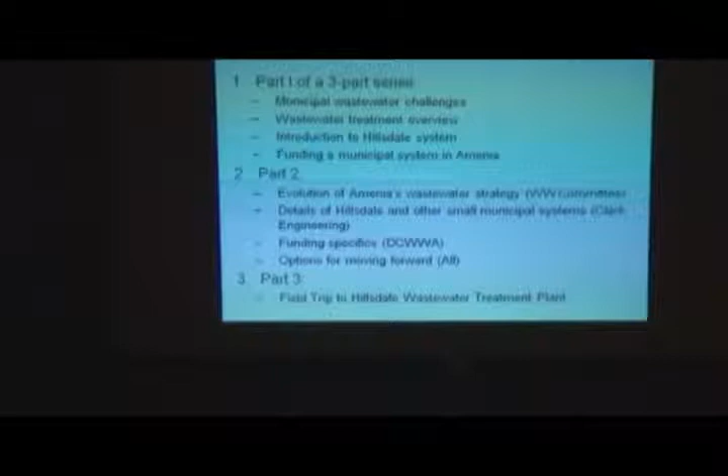The second part is going to be a more technical presentation, where the wastewater committee will talk to you about how they came to make some of the decisions that they did, and the engineer, Clark Engineering, will talk to you about small community examples in other communities similar to what you're looking at for Amenia.

And hopefully the Dutchess County Water and Wastewater Authority will be able to talk to you more about some of the funding specifics, because that's really, I know, what you're most concerned with is how can we make this affordable.

And part three is actually, and this is all kind of setting you up so that hopefully you will come on this field trip to see the treatment facility at Hillsdale, because that is the technology that has risen to the top as maybe the best for Amenia for what you're trying to do here.

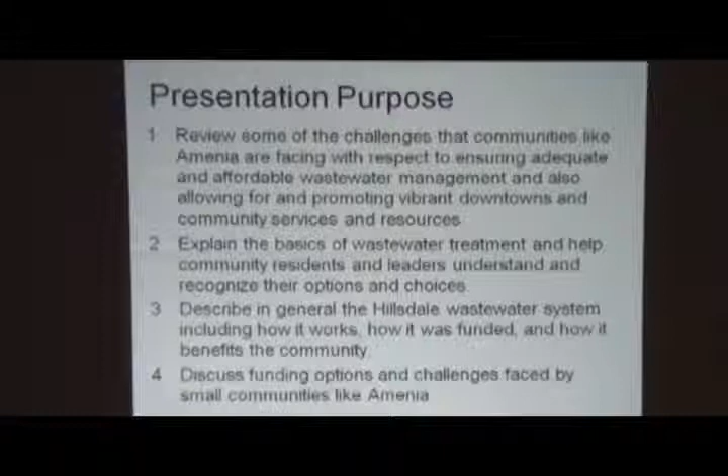So today, again, is to lay some of the foundation of that. I want to review some of the challenges that small communities like Amenia face with respect to assuring adequate and affordable wastewater treatment while still assuring that you have a vibrant downtown with the services that you want and that you need. I want to explain some of the basics of wastewater treatment to help community residents and leaders understand and recognize these options and the choices they're making.

I'm going to describe very generally how the Hillsdale treatment system works, to lay the foundation for a more technical presentation next time. And I'm going to talk a little bit about your funding picture as it is right now and what some of the challenges are that you're looking at.

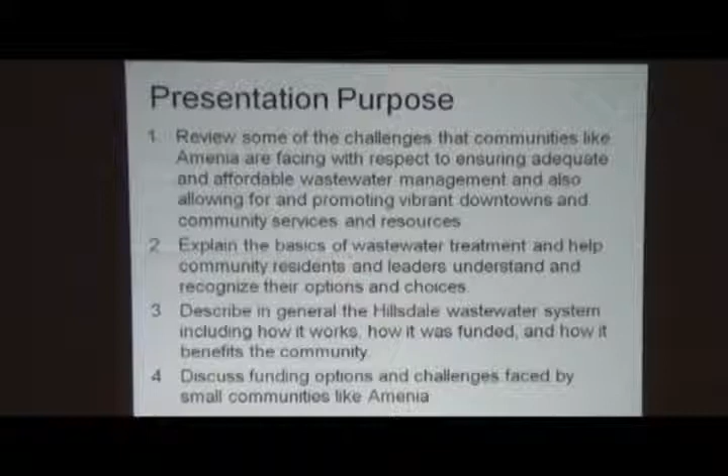So, in communities like Amenia, typically the easy communities have been done already. Those are more larger communities with dense populations where the consequences of failing septic systems are very obvious, dense populations that can bear the cost of the treatment system. Then you have these very small rural communities that are working okay with septic systems, but you're in that intermediate size where, like many communities of your size, you've wrestled with this issue for many, many years.

And proposals have been voted down in the past. You're struggling to find a way to make it affordable, so you're not alone in that. But I recognize there are some serious challenges that have a lot to do with your community size. More densely populated areas have more users per length of pipe and more payers into the system.

And quite honestly, the technical expertise that's available and the training for engineers and others has really focused on larger systems. So this idea of alternatives for small communities has been an emerging field that is growing, but it's not exactly in its infancy - it just doesn't have the history that more conventional large-scale central sewer systems have.

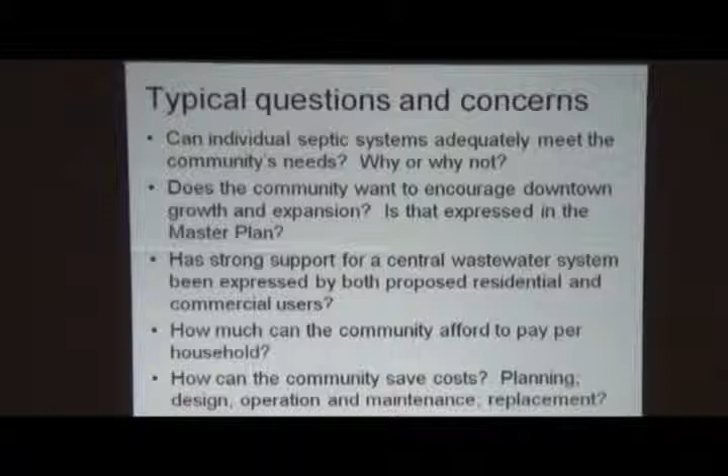And how can the community save costs? How can we make this plan more affordable? Is there something we can do to make it more affordable for us? Is there something in planning or design, operation and maintenance, or replacement? For example, should we be serving a smaller or larger area? Maybe more people, more payers, smaller areas, smaller system. Is there some planning tasks we can go through to help us bring those costs down?

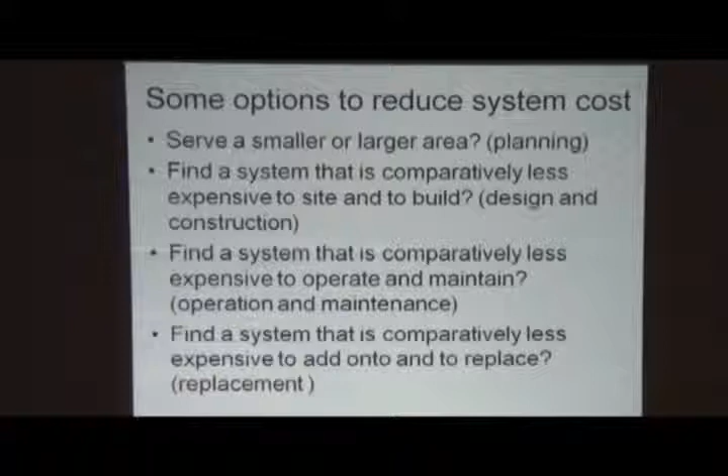Finding a system that's comparatively less to construct and build - that's your design and construction phase. What about a system that's less expensive to operate and maintain - that's your operation and maintenance. And finally, how about a system that's less expensive to add on to and replace down the road? These systems don't last forever, and it's something you want to be thinking about 20 or 30 years down the road, as you'll be looking at expanding, replacing, upgrading, or at the very least repairing the system. So how affordable is that component going to be?

So I wanted to start out with some wastewater treatment basics to help folks who may not have a strong idea, or have some idea but could use more information. I think this is a really important part. We'll talk about why wastewater treatment is important, what wastewater is, how we treat it, and what options small communities have in terms of how a system is configured and designed so you can get the best system for your community.

Well, why is wastewater treatment important? Because we're protecting the waters that we care about. We're protecting our water-based economies, the rivers and streams that we love so much, our recreational resources, and of course our drinking water supplies.

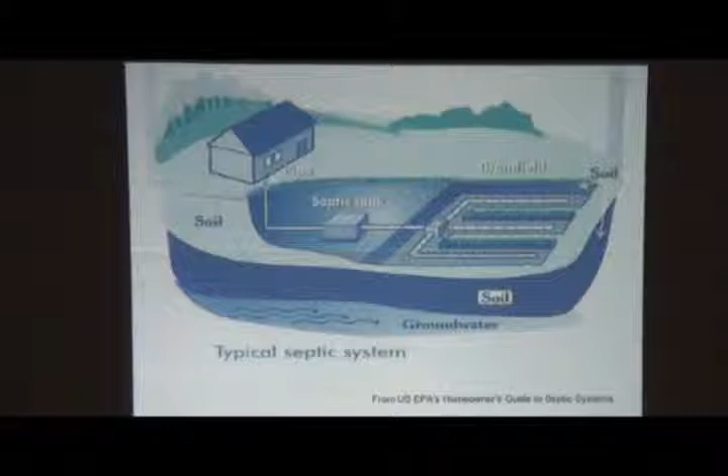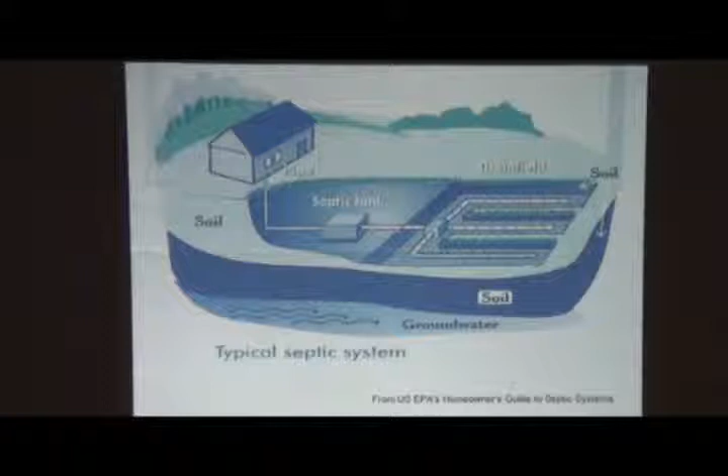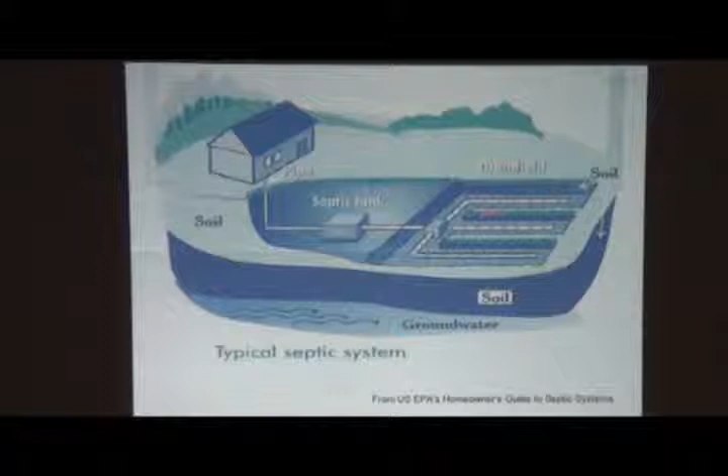Septic systems are your typical first line of defense. A standard septic system - for those of you who might not be too familiar with what's underground, and if you're anything like me, your septic system might not look like a traditional one - it might be simpler, but you've got a collection system in the house, and pipes carry it down to a septic tank underground where the solids or sludge settle out. This settled wastewater comes out to the distribution box, which makes sure each of these pipes gets an equal amount of water. These pipes are laid in soil, which is where most of the treatment is happening.

So what's the problem? Well, one problem with septic systems is they need to be maintained, and as you can imagine, when things are underground, it's harder to see something that breaks. If you're not seeing something visual, like surfacing of wastewater, you may not even realize you have a problem. Maybe a valve is broken off in your tank, maybe your distribution box is crooked and it's only sending wastewater to one line. There's any number of things that could cause your system to be functioning substandard.

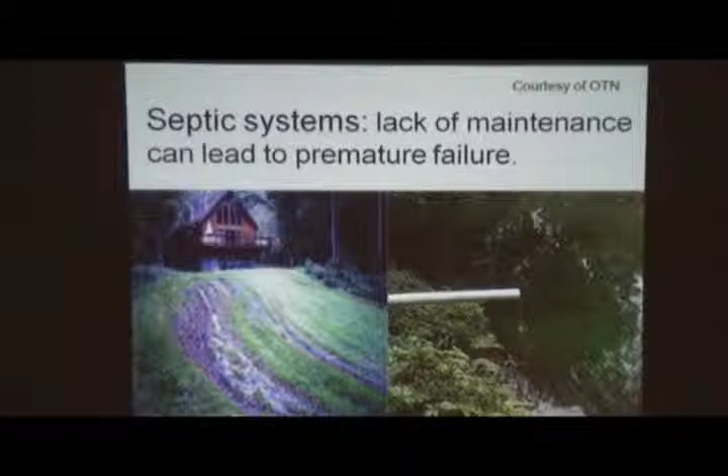Not good. Some other causes of failure or substandard septic system operation: maybe the person who was looking at that site when they were first planning your system didn't evaluate it well enough. Maybe they didn't look at the soils, or they saw the neighbor had good soils and figured your site had good soils too, and maybe it didn't. Or maybe they didn't pick the right system for those conditions, or the installer didn't exactly follow the directions.

That certainly happened. Sometimes you end up using your system more than you thought. Maybe it was an older camp or household, or a newer family moved in with children and you've got a lot more water use. Maybe you added a bedroom.

The system, yes? How many homes in the current district have failing septic systems?

I can't answer that - write that down. I know a number of systems that were failing have been addressed. A long time ago when we did our first income survey and went through the middle of town in the summer, it was quite obvious there were a number of systems you could smell. And I know quite a few of them have been repaired, but I'll let the committee address that.

You also may have inappropriate use, maybe flushing the wrong things down the toilet, quite honestly. That can stress and even damage your system to the point where it has a catastrophic failure. A good example is latex paint - you shouldn't be putting large amounts of latex paint down there, or much at all. I don't let any latex paint go down my system because it really will clog up that drain.

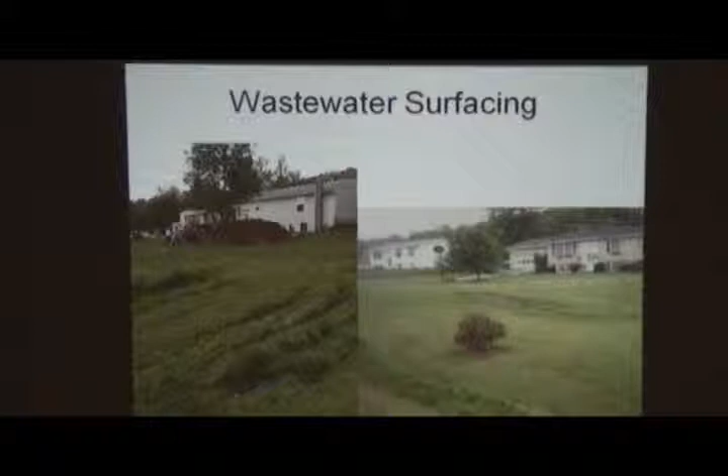Some problems you'll see visually: you see wastewater on the surface of the ground, and it's pretty obvious - you can see it, you can smell it. When it rains, it washes all that untreated or partially treated wastewater into your streams, rivers, the ocean, so it gets carried away beyond the site where there's actually a failure.

You can also have failure underneath the surface of the ground. Maybe your septic system isn't working very well, and untreated waste is going down into the groundwater where it moves towards your surface waters as well. So you can have failures that you don't even know about, that you can't even see.

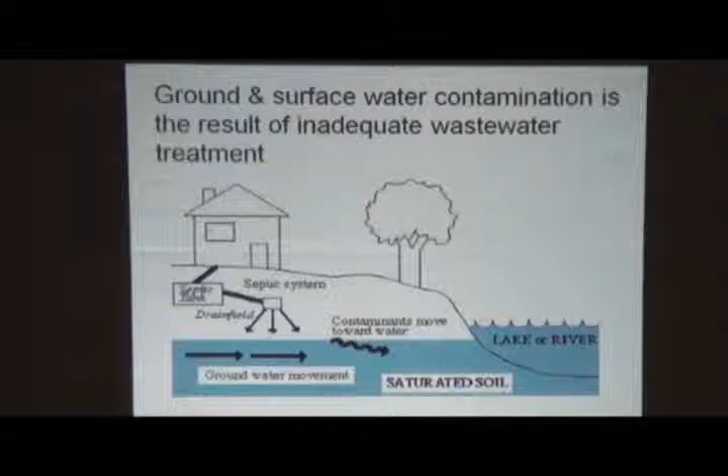Some of the problems are pathogens. What are pathogens? Organisms that cause disease - the ever popular E. coli, the bacteria everyone's pretty familiar with. We've also got a couple of protozoans: Giardia lamblia, which causes giardiasis, and Cryptosporidium, another problem protozoan. We don't really have much typhoid, but Salmonella is another bacteria, and then of course viruses that cause a whole variety of gastroenteric problems resulting in diarrhea and vomiting. These are all organisms that can be transmitted in untreated or poorly treated wastewater, so we have a potential health threat.

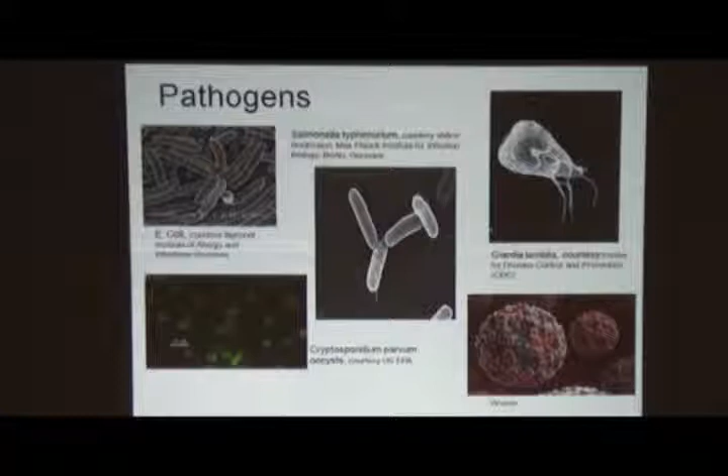Another problem with improperly or poorly treated wastewater is that you have a concentration of nutrients - we're talking about phosphorus and nitrogen. What do we use phosphorus and nitrogen for? Fertilizer. So the same thing happens when these nutrients get into your surface waters - they cause the vegetation in the water to explode, and you can get a lot of overgrowth.

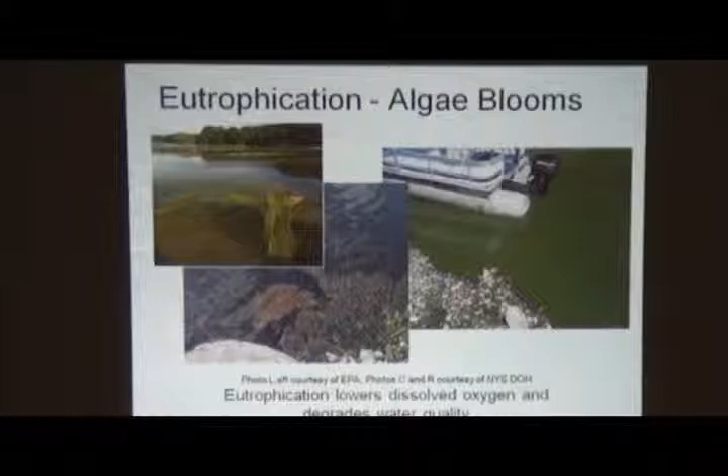For example, you can see the goo here, this algae on the surface, or it can just be totally suspended in the water so that the water looks entirely green or brown. That process is called eutrophication, and it causes problems because it lowers the oxygen levels in the water and degrades water quality. Not to mention it's unsightly.

Some other things to think about when considering a septic system are separation distances. Regulations are set up to provide prescriptive distances you need to meet, both horizontally and vertically. For example, your well needs to be at least 50 feet from your tank, and it needs to be at least 100 feet from your absorption system.

Your system can't be near your neighbor's well, or their system can't be near your well. There's also vertical separation distances, so if you've got a limiting layer underneath the soil of your system—it might be bedrock, very high groundwater, seasonally high groundwater, or a difficult clay layer—you need at least 2 feet separation distance from your treatment area to accommodate that.

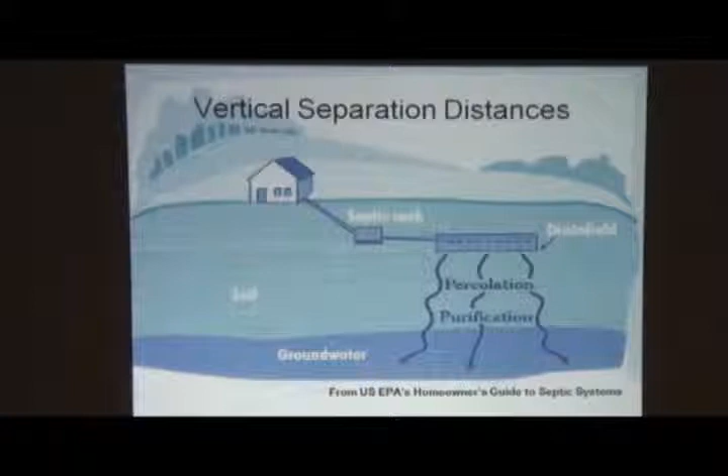These separation distances are often the challenge for small communities like yours, because many times the communities were built without attention to that, and some of the houses are on small lots. They can't meet the separation distances. They may have poor soils, so a traditional septic system is difficult to use, and they may have non-traditional systems that aren't up to snuff in terms of operation.

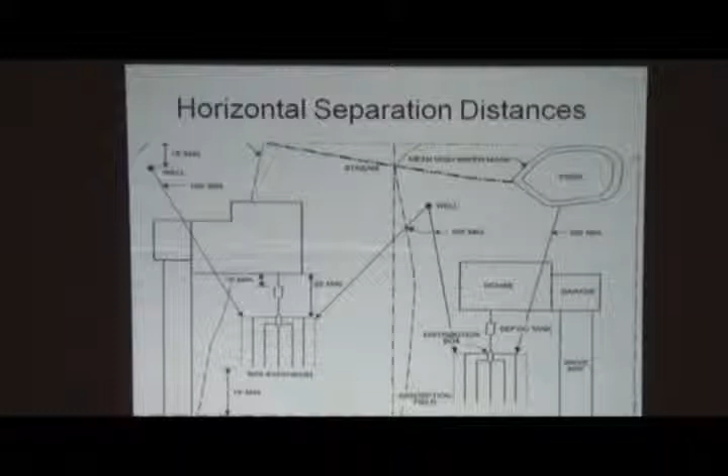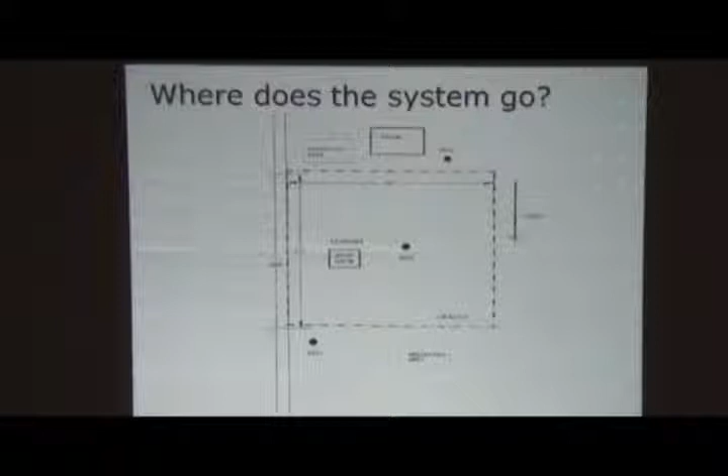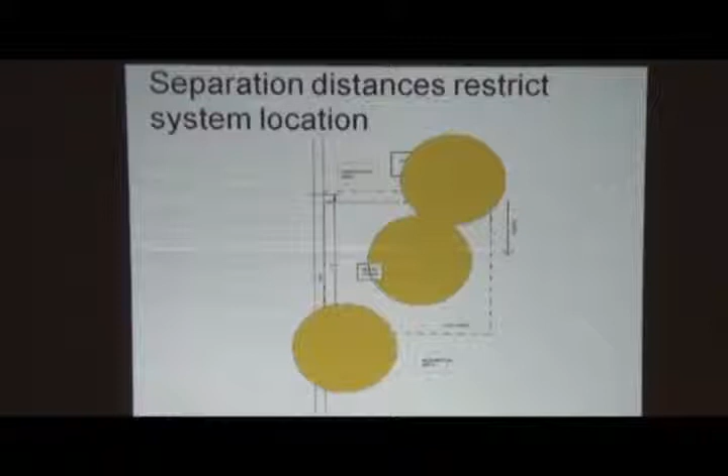Just to point out this issue of separation distances—here's this lot, the proposed house is here, and the well's already in the ground. You put the well in the ground, and this happens a lot; you buy a house and put the well where you want. Here's the neighbor's well, here's the other neighbor's well. So where does the system go? Now we need 100 feet separation from each well. You draw a circle of 100 feet around each of those wells, and it doesn't give you as much space on that site as you thought to put your septic system. So that's a consideration.

And of course, there's regulations that govern these systems, whether it's a septic system or a municipal treatment plant. There's design standards, drinking water quality standards your drinking water sources have to meet, wastewater discharge quality standards if you have a municipal treatment plant discharging to a surface water, and stream water quality standards depending on the stream you're discharging to—it may have even more stringent requirements, which we'll talk about in a minute.

Just briefly, I wanted to talk about who regulates, because it can be a little confusing. Essentially, the Department of Health deals with issues of protecting drinking water sources and public health—that's their sphere of influence. Whereas the DEC looks at protecting waters for other uses, like food sources, public recreation, commercial uses, and even industrial resources. So the DEC is that regulatory agency.

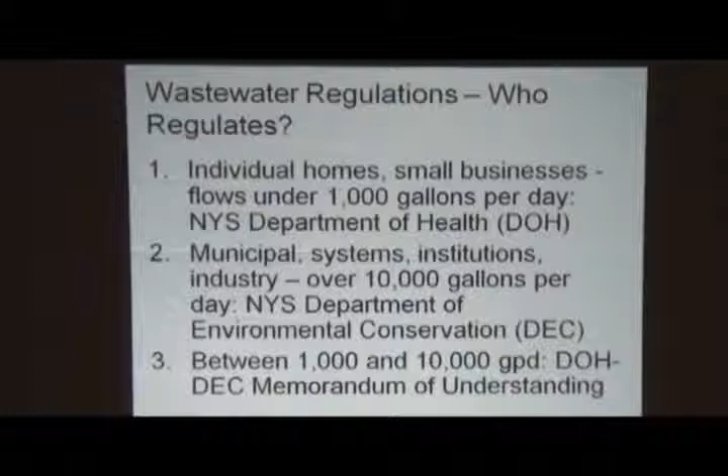When we talk about wastewater regulations—well, I heard the Department of Health regulates my septic systems. That's true: under 1,000 gallons a day comes under the purview of the Department of Health. Larger systems, like municipal systems, larger businesses, institutions, industry, over 10,000 gallons a day, are regulated by the DEC. Between 1,000 and 10,000, there's actually a memorandum of understanding between those two agencies, such that if the Department of Health is already in there—say inspecting a restaurant that has an on-site system over 1,000 gallons a day but less than 10,000—they say, hey, we're in there anyway, so we'll be responsible for overseeing that system. That may help clarify some confusion about who regulates these systems.

So what are your options? As an individual property owner, suppose you have a substandard system or know of substandard systems in your community—what can you do? The very first thing you want to do is have a professional inspect your system, which will involve opening up your tank, very often digging up your D-box, the distribution box, and maybe probing that leach field.

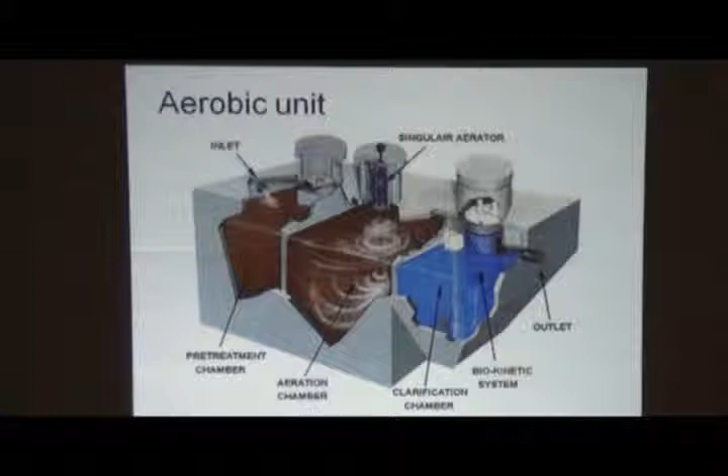I was just going to show you an example of what some of these enhanced treatment units look like. Sometimes they're like a treatment plant in a box, which is what this aerobic unit here, the Singulair aerobic unit, is. It's a treatment plant in a box. Other examples are technologies that are media-based.

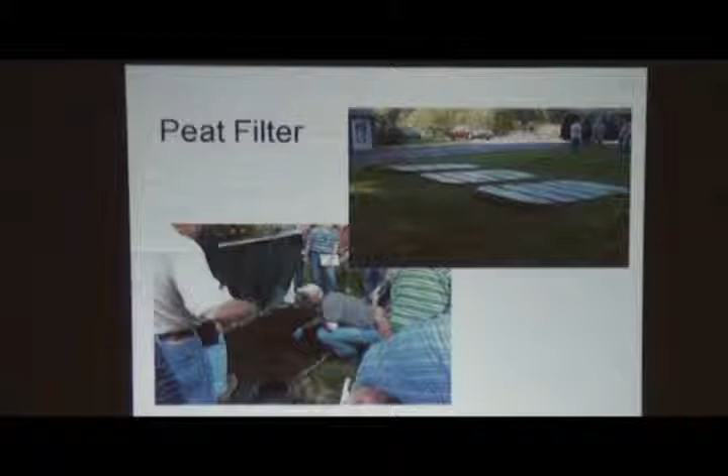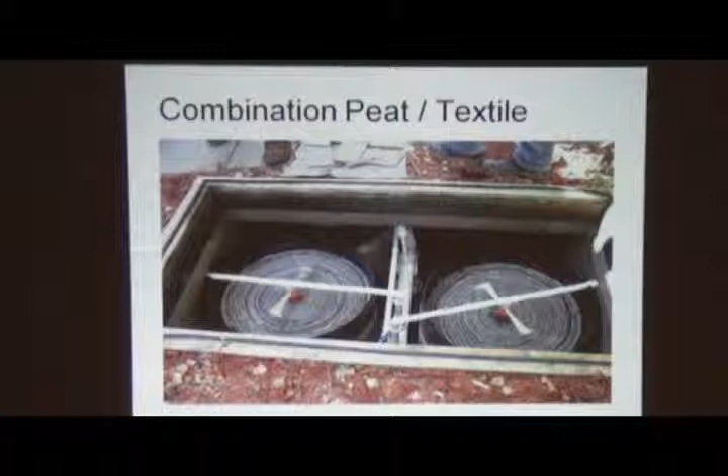For example, you might have a peat system, which produces a very high-quality effluent. Here's a combination of peat and a man-made textile all rolled together, and the wastewater is being distributed over that treatment unit. Foam cubes is one system that we've seen out there. There's any number of media that you could use in these boxes to produce a higher quality effluent.

In fact, I remember one of the systems we saw out in Rhode Island, it was leftover sneaker chips from the Nike plant they were looking at using as a media.

And finally, as an example of another media filter, this is a residential installation of the Orenco AdvanTex system, which is being used by the municipality of Hillsdale. We'll talk about that more in a minute. But you can see this is actually on Skaneateles Lake, which is Syracuse's water supply.

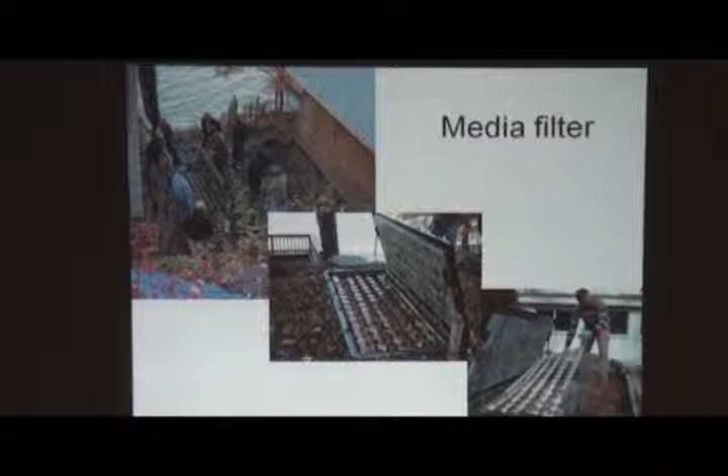And you can see that system is darn close, and there is not much room at all to be working with there. The textile sheets are in this box, and this thing that the guy is lifting up is just the distributors. The wastewater comes out of that onto the media in the box. But we'll talk about more of that in a minute.

But it comes back to what's your vision for your community. If you're really looking to expand that downtown area to get large water-using businesses in there, to have the kinds of services that it's very difficult to sustain, even if you were to put in an enhanced unit, which is what certainly Amenia has been talking about for many years, is improving and expanding and being able to create a more vibrant downtown.

So that brings you to the idea of a municipal system, and that's where I wanted to talk today about what is involved in wastewater treatment, so you can see where some of these decisions that have been made, why they were made.

So very basically, wastewater treatment, it doesn't matter whether it happens in a tank or a municipal plant or a commercial system, you're doing the same processes. You're collecting the wastewater, you're separating out the solids from the water portion, you're treating those two waste streams, you're dispersing the treated wastewater, and you're disposing of your treated sludge.

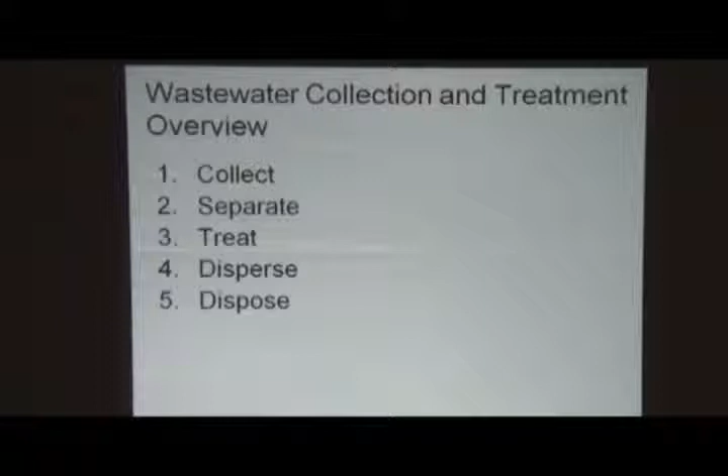So again, collection and transmission. We're collecting wastewater from the source, transmitting it to the location. Separation and treatment. We're separating the liquid from the solids, and we're biologically treating the wastewater and the solids separately.

The biological treatment process is called secondary treatment, and that's the bulk of your wastewater treatment. That's where the real treatment's taking place. And then you have this even further treatment, a polishing step, where you might be, for example, dealing with unruly nutrients, and phosphorus comes to mind, particularly in the case of Amenia.

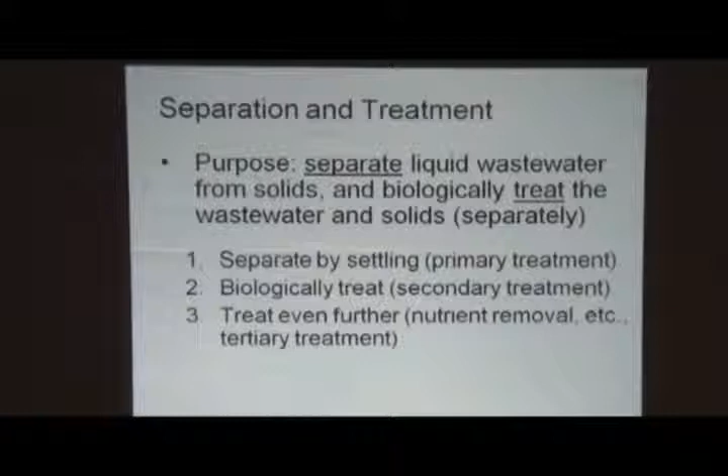Dispersal, again, you're dispersing the treated liquid. You may be doing that to a stream, or you may be doing it subsurface. We'll talk a little bit about that. And you're disposing of those treated solids.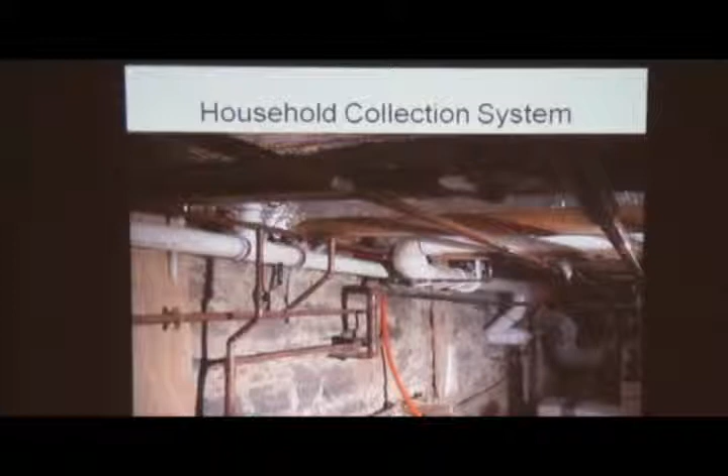...but still the same concept. You're collecting wastewater from the house the same way that you're sending it into a municipal sewer.

And there's two basic choices of sewer. One that handles solid matter and one that doesn't. And it makes a difference. It makes a difference to you. So let's talk about that.

Some examples of some solids handling sewers are typical, conventional, what we think of as gravity sewer. You may also have heard of things like grinder pumps and vacuum systems. These effluent systems, these effluent sewers aren't dealing with the solids. They're not solids handling sewers. And how do you get the wastewater to the pipe?

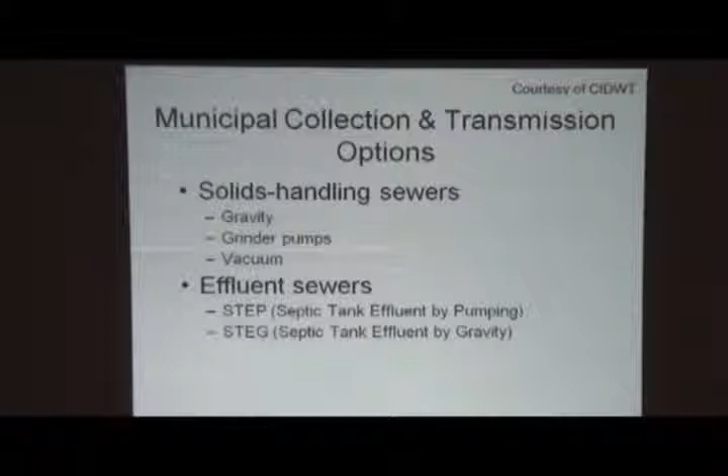Well, maybe you get it there by gravity, and they call that septic tank effluent gravity, or STEG. Or maybe you have to pump it up to the line, septic tank effluent by pumping. So let's take a closer look at that.

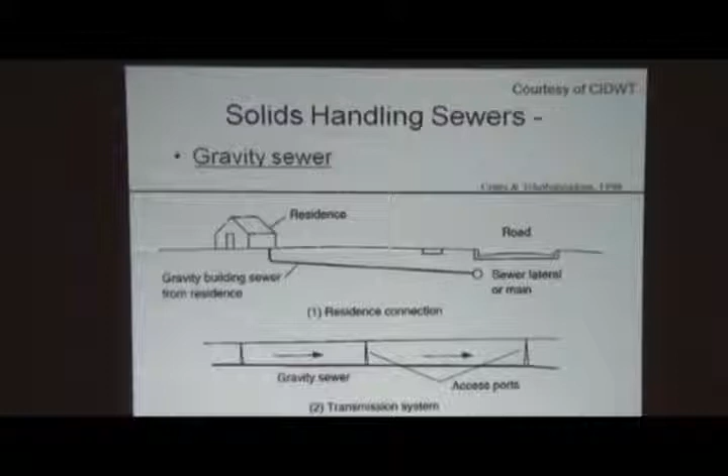And you can end up going very deep. After a while, you have to pump it back up. You can only go so far. So you can have pump stations that have issues that need to be maintained.

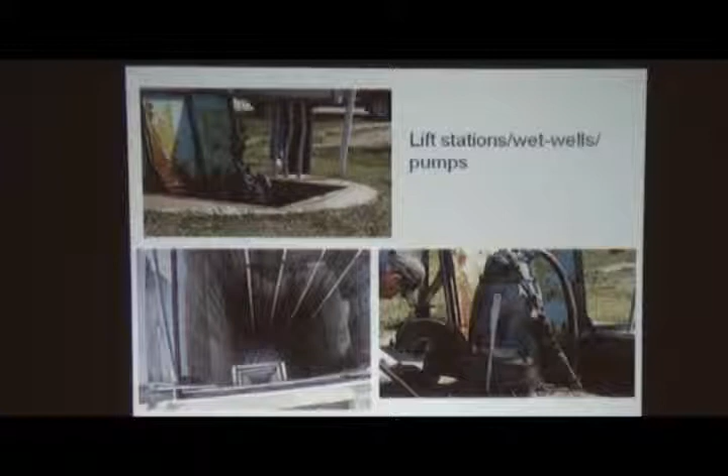Sometimes you can have water infiltrating, or if they're not kept well maintained, you can have water leaking into your system, so you're actually having non-wastewater being treated in your plant, and you don't want that. That's called infiltration. Some other options for solids handling sewers, you may have heard of grinder pumps.

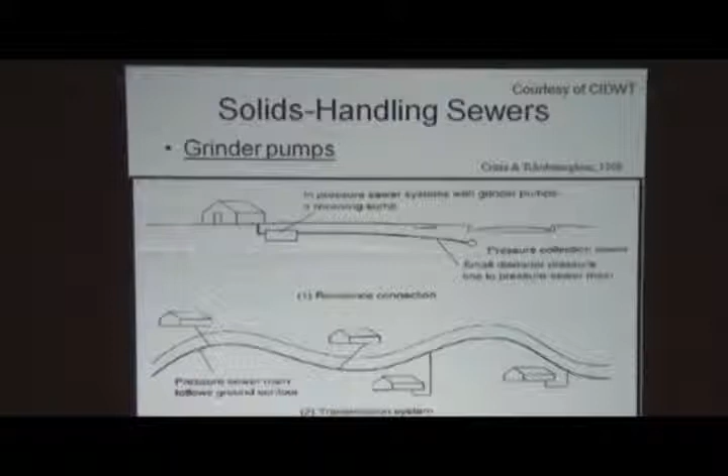What happens in this system is you've got a grinder pump that's grinding up your solids, and you're sending that ground mass down to this pressure collection sewer. You have some flexibility because this, again, is a smaller pipe. You can use a smaller size transmission main that can follow the ground contours.

Effluent sewers are kind of neat because instead of the solids going all the way to the plant and having to be settled out once they get there, you're actually keeping your septic tank. You might have a new septic tank, but you're still settling your solids in your traditional septic tank.

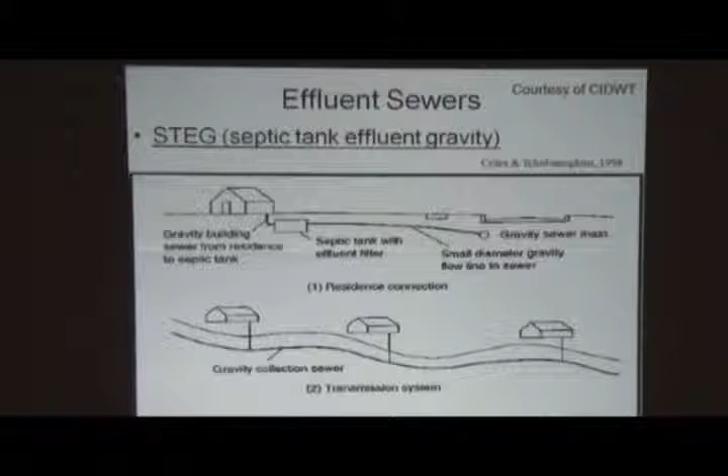And then here's your gravity feeding down to your gravity sewer main. Again, you've got a small diameter collection pipe that can follow the contours of the land and gives you more flexibility. It might be cheaper, we'll talk about that in a second. Or you might have a pump that pumps that settled wastewater to that small diameter collection system. So again, that's what STEP and STEG is, gravity or pump.

Very often you might have a combination of the two, depending on where the households are situated relative to your sewer line.

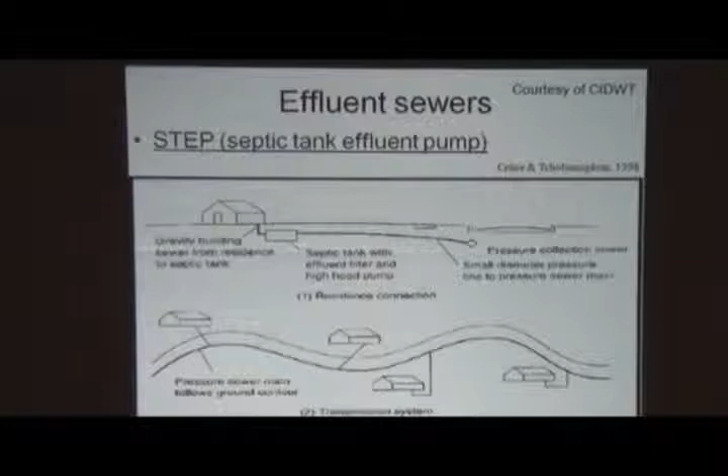Some of the features of a small diameter collection pipe: because they don't always rely on gravity, they can be buried at more shallow depths, which saves you the cost of excavation. In some areas, particularly rocky areas, that's a huge consideration and a huge cost. They can follow the contours of the land, and they may be less expensive. They should be less expensive and easier to install.

There's been a lot of progress in terms of technology for directional drilling, so you don't have the same excavation costs. You can install these pipes without huge excavation. They're less likely to have water invade the system, through inflow and infiltration, and they can be more easily routed around obstacles, which gives you more flexibility.

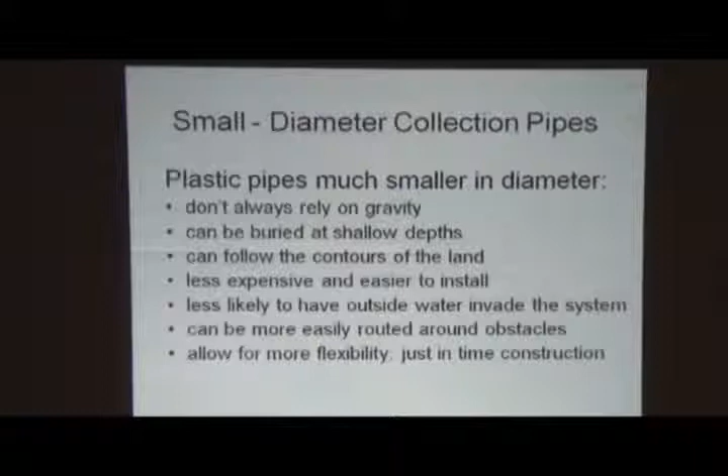It also gives you flexibility for adding on, what they call just-in-time construction. So you're not building a huge system in anticipation of growth that may take 10 or 15 or 20 years down the road to happen, so you're not overbuilding your system right away.

A conventional sewer system, a gravity sewer system, is appropriate for densely developed areas. This wastewater travels by gravity through a system of sewers and pumping stations. It may be more difficult and more expensive to install, and usually is. Of course, they require manholes and pumping stations, and as I mentioned, you may have an opportunity for leakage into that system.

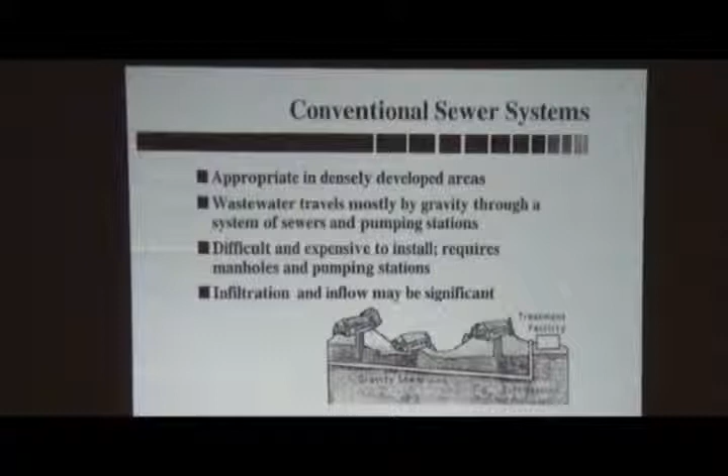Whereas the small diameter collection system, again, you're collecting your solids in your septic tank. You're sending that out to your small diameter line, either by gravity or by pumping.

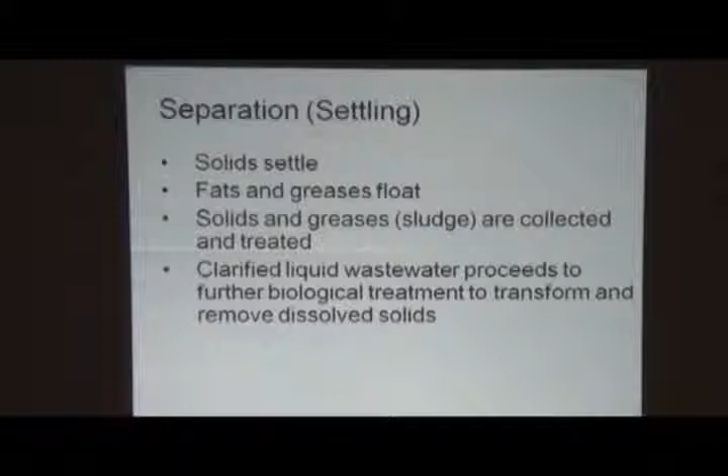So separation when you're settling, real simple. Whether you're in your septic tank or in a clarifier at a municipal treatment plant, the solids settle out, you want to make the flow go really slow, and the solids settle out, the fats and greases float, and this clear water in the middle. That's your wastewater proceeding on to the biological treatment phase, this clarified liquid wastewater.

So in a septic tank, you've got wastewater coming in the inlet, and it hits this baffle. A two-compartment septic tank works best, and you have a baffle. Because it's a vertical baffle, what it's doing is slowing down the flow right away, and it's forcing you to start the settling process. With slower flow, the solids drop out more rapidly.

So as you move under the baffle, the scum and greases and fats start to float to the top. Typically you might have a smaller opening to prevent the solids from floating up into the second compartment and to keep the scum and greases from getting sucked in here. You want to get as clear as possible liquid wastewater here, where more settling will still happen, and more grease will float. And you have another baffle to keep that stuff out.

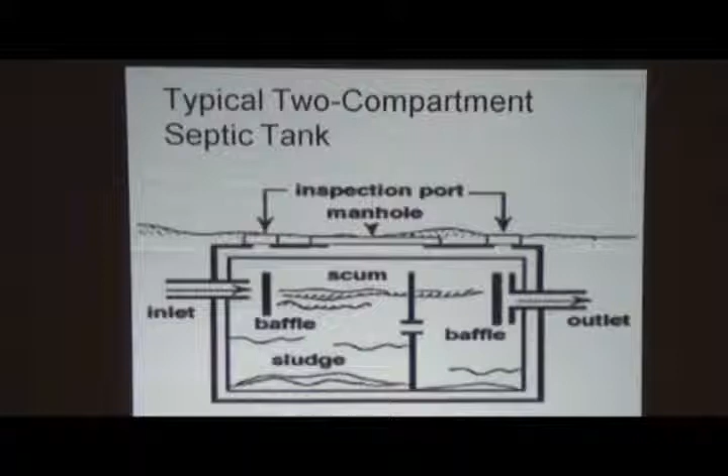In fact, you get a little degradation of those solids in the septic tank, and what happens is you get bubbles that surround them, a product of the respiration of the organisms, and you get bubbles around your solids, and they start to float up. They can float right out into your leach field and clog it up. So a baffle on the outlet helps to trap those solids, and many folks in the industry really recommend you have some kind of effluent filter there, to further trap those solids and keep them out of your leach field, because they will cause trouble.

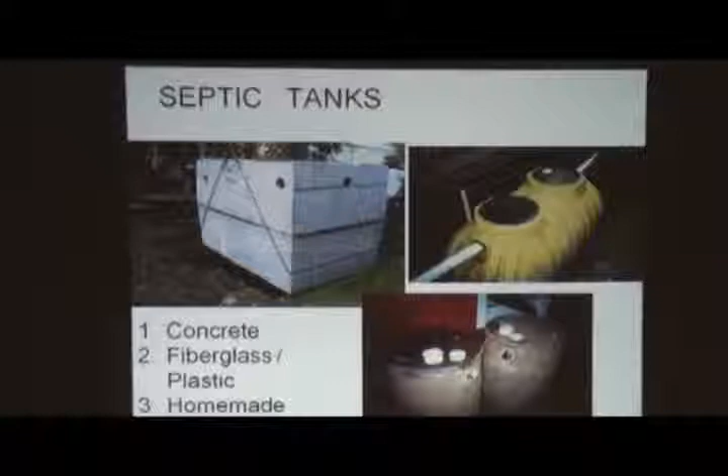Septic tanks, as you know, are made of a variety of materials. Concrete's very common. Plastic tanks are frequently used, especially on difficult sites where you need to move them in. And of course, the homemade tanks—we're still looking for a picture of that '55 Chevy that people say is buried out in the farmer's land.

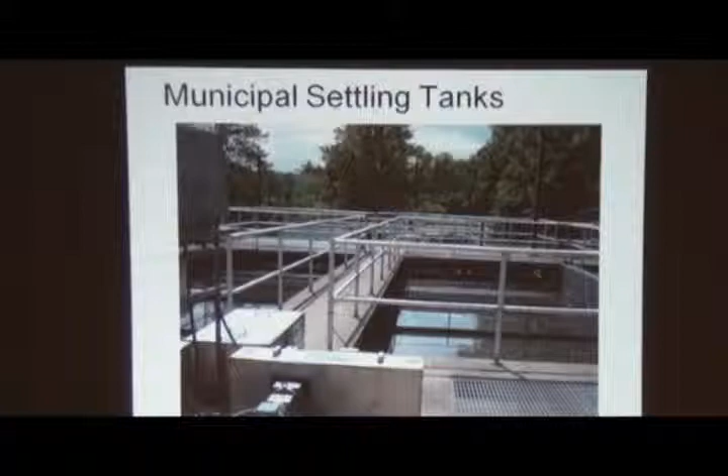But whether it's happening in a tank or a municipal treatment plant, it's the same thing. You might have a circular clarifier with something that goes across the top that scrapes your grease, or it might be a square tank like this that scrapes the grease off, and the solids are collected at the bottom for further treatment elsewhere.

So we move into the secondary phase of treatment, which is a biological process where the microorganisms break down the wastewater as food. When you think about this clear wastewater, you're saying, well, the solids aren't in there, what's the problem? Well, there's still a lot of dissolved material, and you'll see it as a color—the wastewater itself is colored, and that's from dissolved solids. So how do you get that out? You can't settle it. The microorganisms use that as food.

And as they respire, as they use this as food, they translate it into solid material—it comes out as bug bodies. Those organisms die and they become solids, which you can further collect. So you have solids collection even after the secondary treatment phase in a treatment plant.

So successful wastewater treatment is about providing a great home for your organisms. That's what all this is about, a good home for the organisms to thrive. You're going to provide them the location, the food, the wastewater, and ensure they don't have extremes in temperature, pH, or time—toxic things you don't want in your wastewater that could kill those organisms. That's why you don't want to be pouring poison down your septic tank or into the system, and why that can really be a struggle for some municipal plants—that pre-treatment, making sure industrial or commercial waste has those toxins or other high-strength waste treated before it comes to the plant.

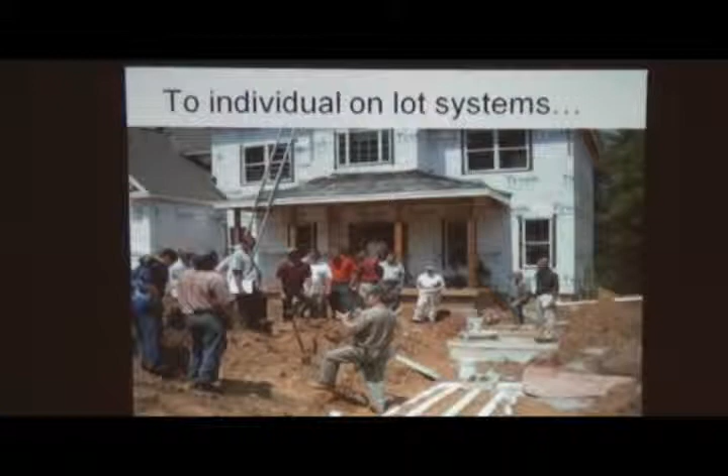But whether it's large-scale plants, an intermediate-sized community system, a small community innovation like Hillsdale, or an individual septic system, it's the microorganisms that are providing the bulk of the treatment, and that's the big thing you always want to keep in mind. So where do the organisms live in a typical septic system?

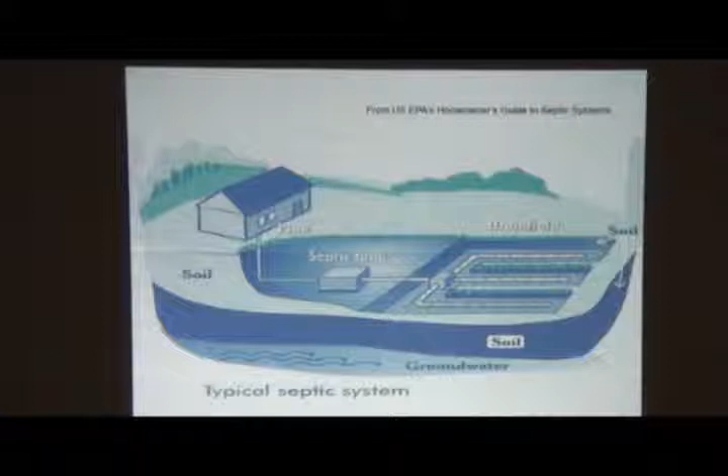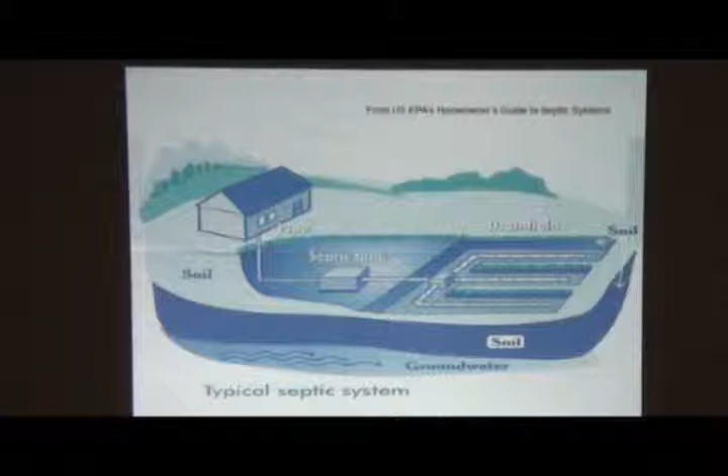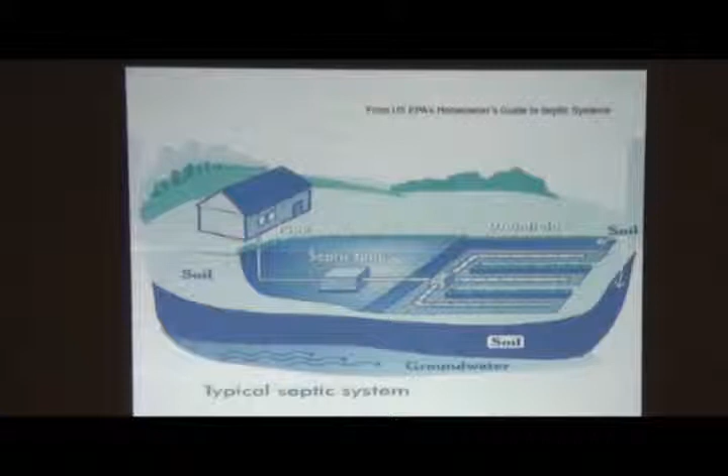There are organisms that live in the tank, and there's some that live in the field. The ones that live in the tank are what we call anaerobic organisms. They can thrive without free oxygen, and there isn't much free oxygen in that septic tank. The problem with those guys is they don't grow very quickly, and they take a long time to treat wastewater.

Whereas these other organisms, aerobic organisms that like free oxygen, work much more quickly and effectively and efficiently to break down the wastewater, and they live out in the soil in your field.

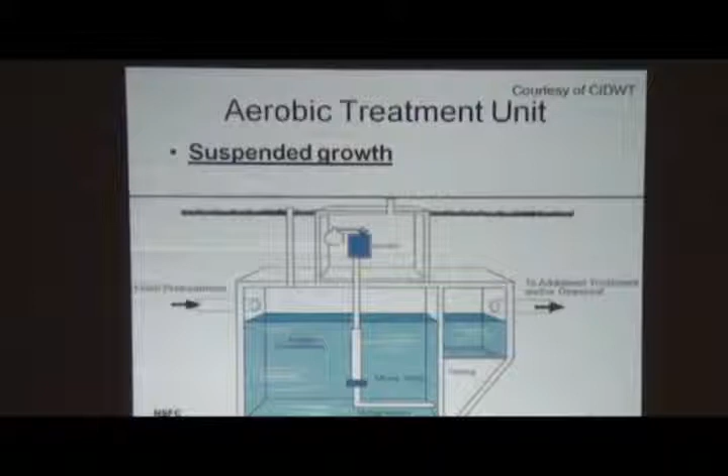In a municipal plant, your organisms may be suspended in a tank. This is actually a picture of an ATU for a residential system, same concept. When you're in a big wastewater plant, you've got a big tank and you're aerating that liquid to give the organisms as much oxygen as they need to devour your wastewater.

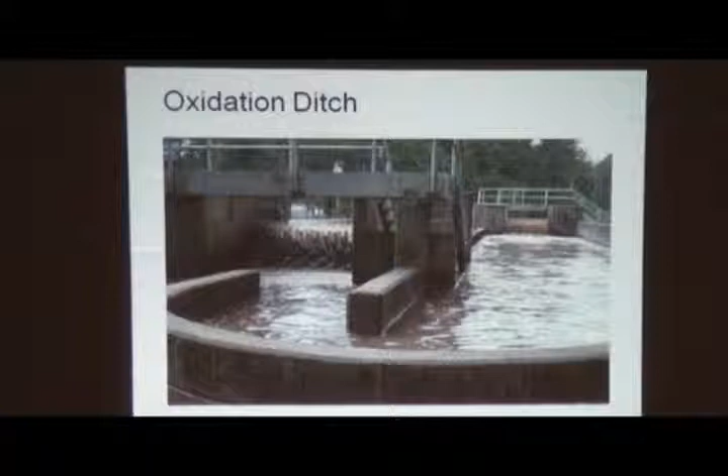They might be suspended in something like a lagoon. Here's an oxidation ditch, this is in Woodstock, and this is where the organisms are doing their breaking down. I'll show you a better picture here - this brush aerator. These two brushes keep stirring up that wastewater, keep putting that oxygen into the tank.

The problem with brush aerators or other aerators is they can get expensive from an energy perspective. It costs money to run them, so your electricity cost when you're aerating a tank can be substantial. And as you know, with energy costs rising, it's more important now than ever.

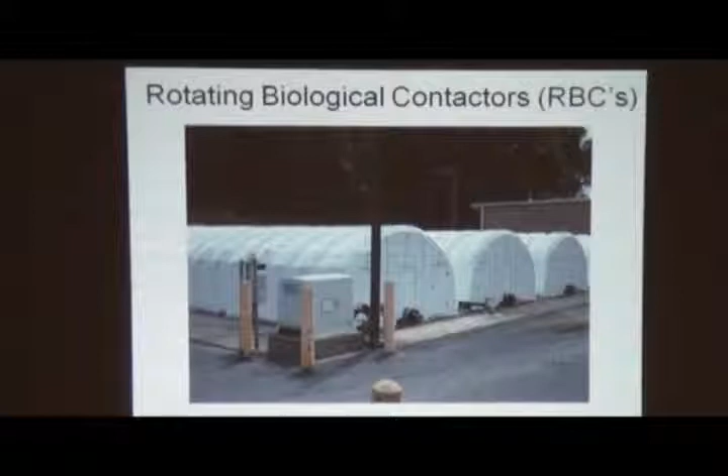Here's an example, this is in Saugerties Village, and these are rotating biological contactors. This is another kind of home for microorganisms. Instead of being suspended in a tank, they're actually fixed onto a media, and we call that fixed growth or attached growth. Inside those tanks are actually these discs.

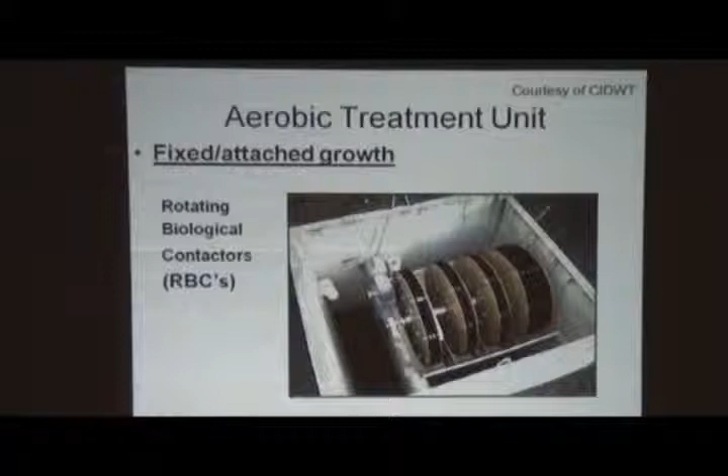And they're housed in these large tanks. Another common treatment system that used to be very popular in the old days is a trickling filter.

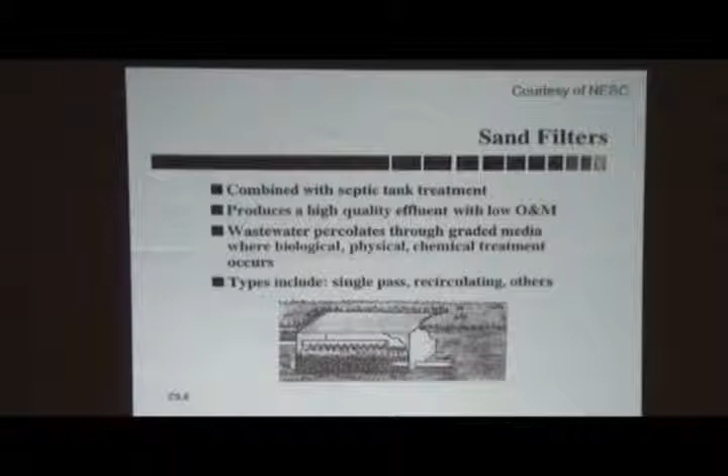Sand filters are a common small community option, and in this case, same thing - the media here is the sand, and the organisms are attaching to the sand particles, and that's where they are doing the treatment.

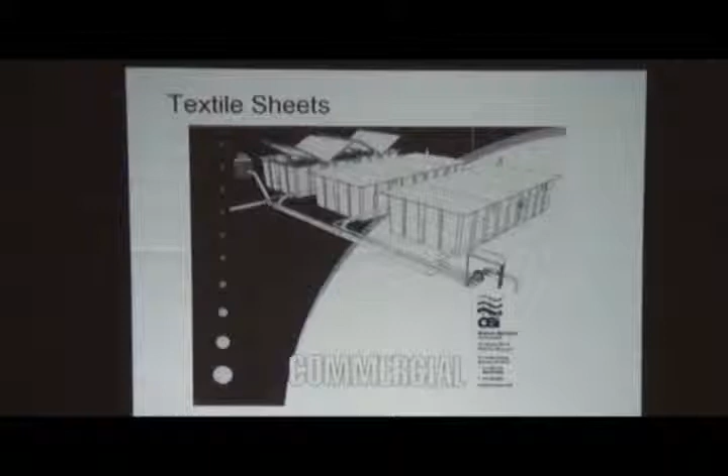As I mentioned, these textile sheets are another opportunity for a media that organisms can attach themselves to. This is what the Hillsdale treatment system is using, and we'll talk a little bit more about that in a minute. But just so you get the idea, we're finding a home, we're providing a place for these organisms to live that we can control and that we can ensure have the conditions for wastewater treatment.

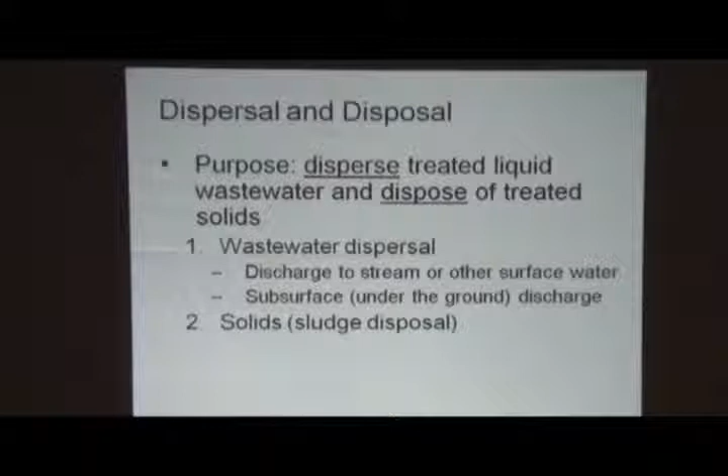I talked about stream classifications. When you're wanting to discharge to a surface water, it's good to know how regulators look at streams. They talk about headwater streams, where the streams originate up in the mountains, year-round streams which are perennial streams, and then we have seasonal streams which are intermittent - they're not running all the time. When you're discharging to an intermittent stream, you have to have a lot cleaner wastewater.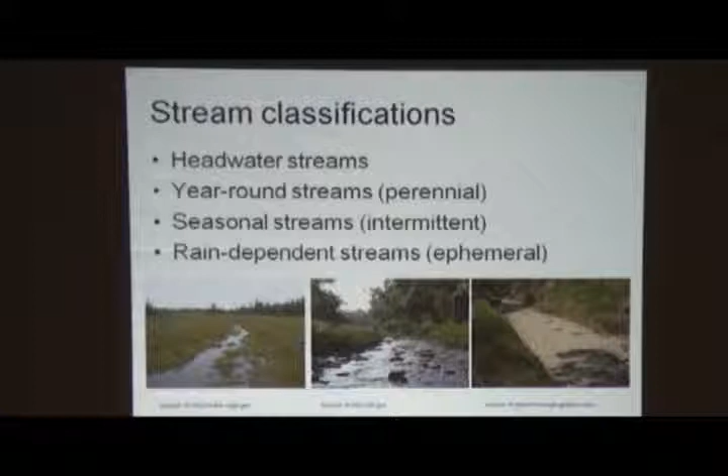You're not allowed to discharge the same quality as you would to a year-round stream, and that's a real important concept. In fact, in the Town of Amenia wastewater collection and treatment feasibility study that Clark Engineering did, they made these points about intermittent stream discharge limits being the most stringent level of treatment required by DEC. Your effluent's got to be as clean or cleaner than that receiving stream. In fact, the discharge is actually anticipated to improve the quality of that stream.

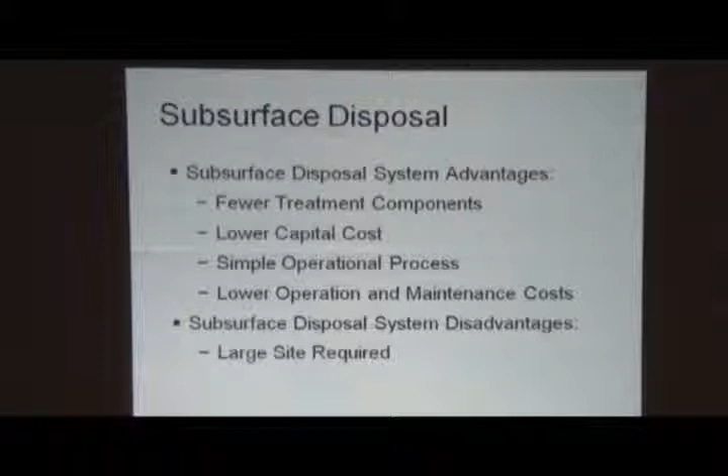Then we come to subsurface disposal. There are some advantages: fewer treatment components, lower capital cost for construction, a more simple operational process, lower operation and maintenance costs, and much simpler reporting requirements than a surface discharge. The biggest disadvantage is you need quite a bit of land, because you're putting it into the soil, and you need enough soil that can receive this treated wastewater.

Finally, briefly before we get to Hillsdale, sludge treatment and disposal. There are a number of ways you could treat your sludge, but at the end of the day you're taking the water out of it. Sludge sounds like it's solid, but it's really mostly water. So the first thing you need to do is de-water it, dry that solid to get as much water out as possible, so that no matter what you're doing with it, transporting or using it, you aren't paying to transport or use that water.

You may have heard of or seen digesters, large buildings where sludge is digested by anaerobic organisms. One of the byproducts of this anaerobic digestion is methane, and many plants that do anaerobic digestion will capture that methane and use it for energy. You may also compost. If you let the sludge sit in a pile, it's like at a landfill where piles of wood chips can spontaneously combust. There's a lot of heat from organisms breaking down the material and generating heat, and that's happening when you compost sludge too. That heat helps treat the sludge.

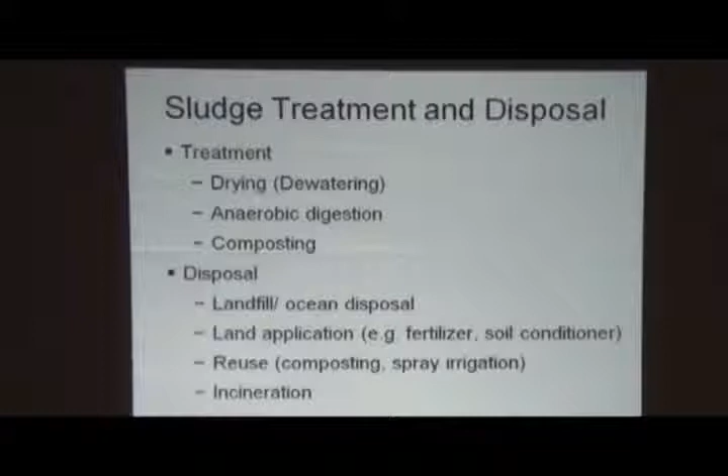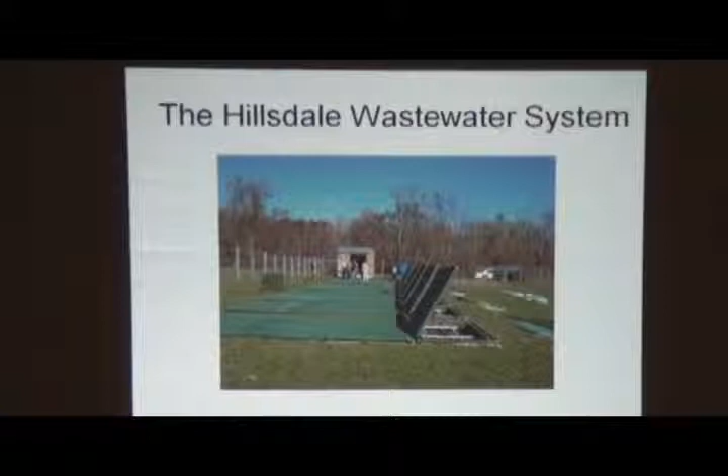So, which brings us to the Hillsdale wastewater system. This is the Hillsdale wastewater treatment plant. The tops of the pods are open for us to view because we're on a tour, but ordinarily they're all shut. Their collection system utilizes individual septic tanks at the house, a small diameter collection system, and a septic tank pump system — I think some are gravity as well.

Oh, it's all pumped? Okay. Some of—

And the town manages that septic tank effluent. One of the interesting things one of the operators told me — the guy who runs the Catskill plant, who also oversees or did oversee the Hillsdale plant — he said it was so great that we can control what goes into the plant. We don't have an overage of grease. They have a lot of problems with fats, oils and greases at the Catskill plant, because there are a lot of fast food restaurants and restaurants in general, some with undersized grease traps, and regulations weren't being as well enforced. At Hillsdale, he said, it's great because we can look at these restaurants' tanks, see the problems, and do the pumping before it becomes a problem. It's not coming down to the treatment plant — we're pumping these solids out and dealing with it elsewhere. That was a wonderful operational benefit for them.

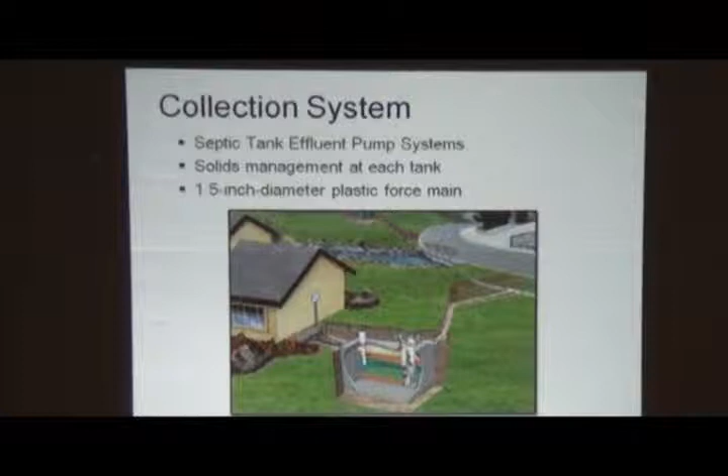The media system is this Advantex media filter.

But what's so cool about that? Well, the cool part is organisms live in the space between the cracks. They need air to circulate, and they need a place to live. And there's so much pore space in these sheets - that's what makes it so neat.

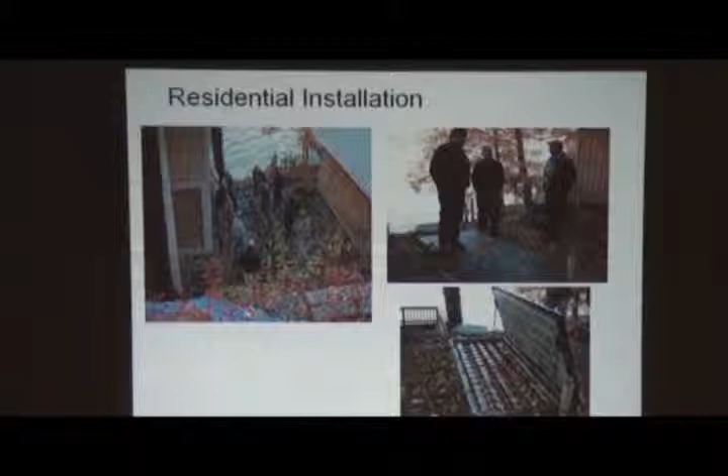Here's an example of that residential installation we saw over at the Syracuse Skaneateles Lake. And of course, you can see this tank is quite robust - you can stand on it, and here is the single open tank. The Hillsdale system has a series of 8 tanks, much larger than you have. They have 8 commercial pods in a row.

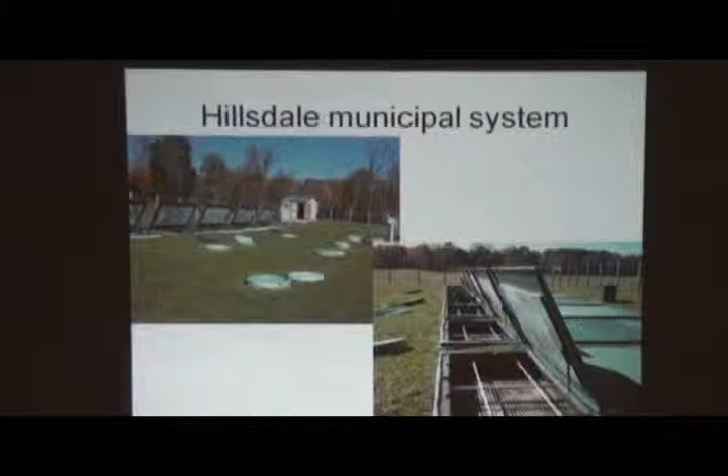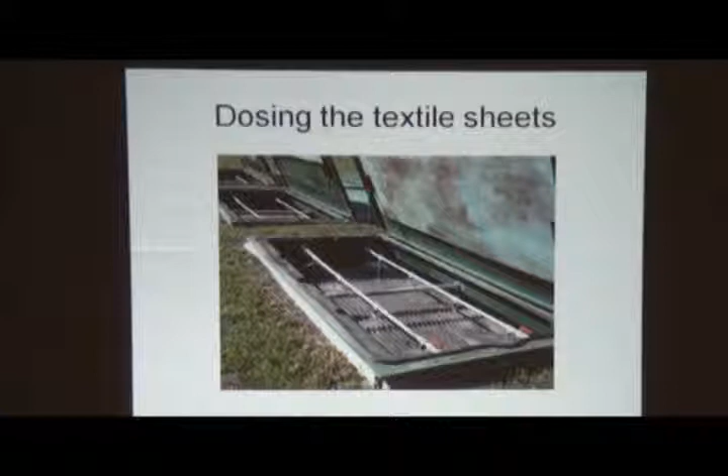And let's see if we can get a picture of the wastewater being spread out over these sheets. In fact, sometimes when you're doing maintenance, they might just pick up the sheets and hose them back down into the tank. It's a very flexible technology.

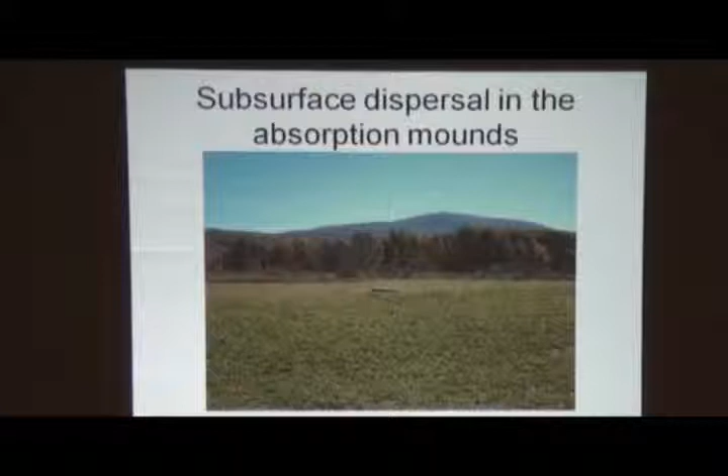So, back to Amenia and paying for that municipal wastewater treatment system - that all-important issue of affordability, of getting the lowest cost design that's still going to do the job you want it to do, to have the lowest operating costs that you can get away with, and to find funding, low-interest loans, and ideally some grant money as well. So how does that work?

Well, these funding agencies use what they call a target service charge. The way they do it is they want to be able to compare different communities and how much you can afford, and they typically use this median household income. What's a median household income? That's like, for the median household income in this room, if each of us put our income in a list from highest to lowest and picked the one in the middle, that's the median.

So the top 10 people could be making billions, but the median would still be the one in the middle. So it's not an average, it's the median.

And this target service charge - this is nationwide affordability, debated around the country and around the world. What do we consider affordable? It used to be somewhere in the neighborhood of about 1 to 1.5% of that median household income. Not surprisingly, over time, it's jumped to be closer to 1.5 to 2%. And quite honestly, across the country, it's not uncommon to find 2.5 to 3% of that median household income as what a single household unit could afford.

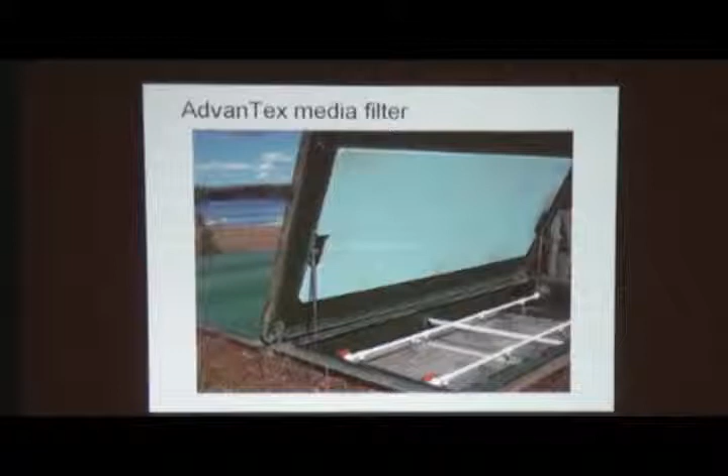So these systems, do they spray them with these organisms? Can you describe the whole thing? Let's go back a couple slides. And then they eat up the bacteria, is that what happens? Actually, it's a little different. The bacteria is what's eating your wastewater. They're transforming the solid material into a removable component, and they're digesting this, and also dying off and settling out as bug bodies.

But you've got these bacteria, that's what's transforming your wastewater, that's what's actually doing the treating. So these are good bacteria. We're used to thinking about bacteria in terms of pathogens, and I mentioned some bacteria that cause disease at the beginning of the presentation. But these organisms are found in nature, and they're found in your septic system, and they are breaking down the wastewater, and that's what we mean by treating the wastewater.

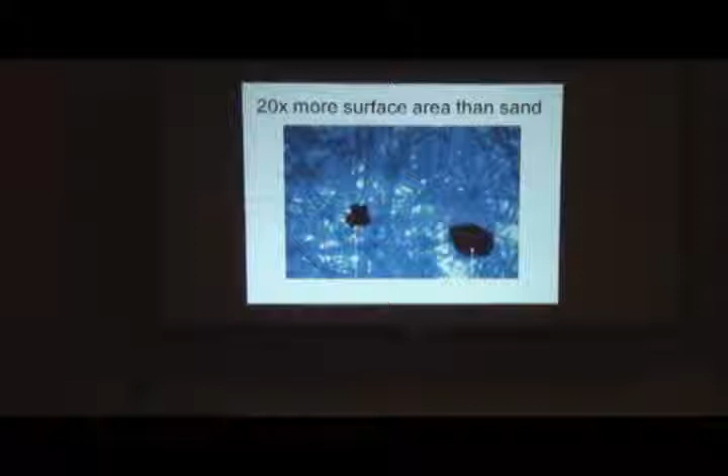So in this case, these textile sheets are serving as the home. This is where the bacteria doing the wastewater treatment live. And where do they live? This is an electron, or microscopic, version of that textile media. If you look into that and see all the spaces there, those are pores, those are air gaps. Air can move through that, wastewater can move through that, and there's plenty of room to cram in a whole bunch of bacteria, microorganisms doing the wastewater treatment.

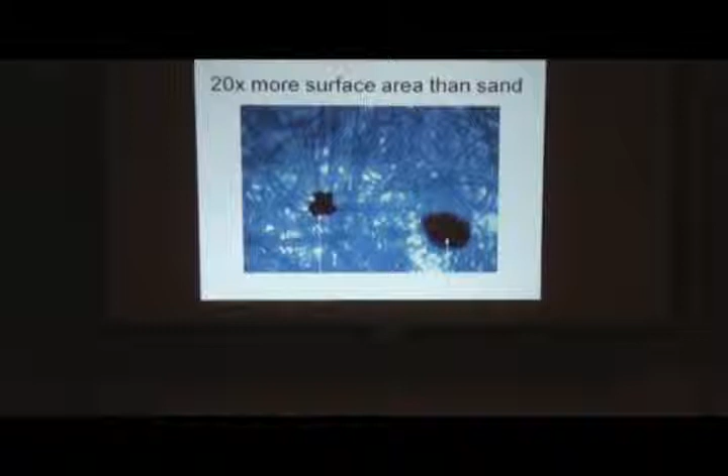So the neat part is that you can get a higher concentration of organisms in a box. Whereas if you had a box of sand, it wouldn't have as much pore space, and you wouldn't have as large a population of microorganisms in that exact same space. Thank you. Sure. When you're using this kind of system, you were talking about a three-part process, there's the separation by settlement...

The proposal for Amenia does involve an independent phosphorus treatment technology, so that would be an add-on. This does reduce it somewhat, but not to the levels you're looking at reducing it here, and that partly depends on where you discharge. If you can do total subsurface discharge like Hillsdale, you have less treatment required.

Correct. Robin? I was just wondering, on the state level, is the state on board for all these optional or different types of futuristic, in one sense of the word, systems to take over this? Connecticut, I don't think it's on board with a lot of stuff.

What a wonderful question. I really, unfortunately, know less about Connecticut regulations than, say, Massachusetts or New York. But what I really like is what the regulator, John Sansalon, said to me: when we look to approve these systems, we want it to make sense. We don't want to see things that are going to break, that we can't find parts for. It's got to make sense, and it's got to be easily maintained, and that's what their engineer is looking at when approving these kinds of technologies.